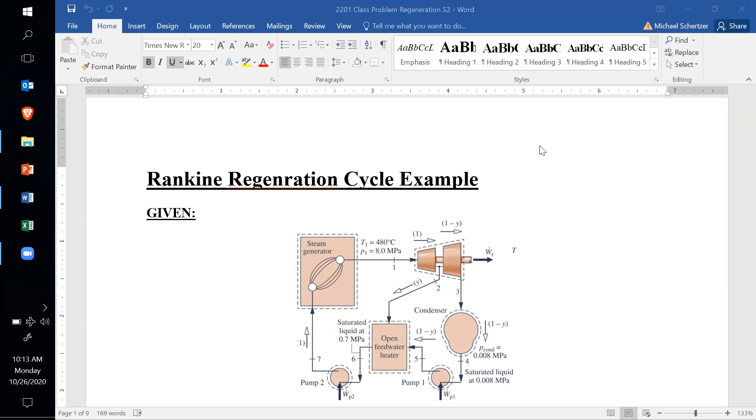Okay, so let's say this is an exam, and I open this up and I see a Rankine regeneration cycle.

Oh, looks like we do have a question here. Is there an SIS grade and a MyCourses grade? Which one is the actual grade you received?

My Courses will give you a current numerical grade, what you have in the course. I think by SIS grade, maybe you mean letter grade. I don't know what the conversion from the numerical grade to the letter grade will be exactly, because it does change a little bit every year, because of the way that we do things in this class. We try to give ourselves the freedom to challenge you on exams, which means that we don't hold tight to, you need to get over a 90 to get an A.

So typically the grading scale looks a little different in this class. Once we have all the grades from the second midterm, I'll post another relative standing sort of graph so you can see where you are if the class ended today. But remember, the final can still overwrite one of your two midterms if you do better on the final than the midterms. Yes, so I will put up another breakdown. We just have to have all the grades in first.

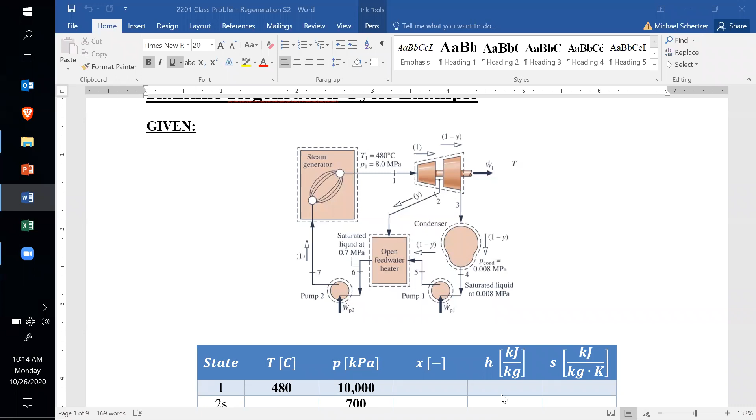So if this was a final and I see something that looks like a Rankine regeneration problem, what I want to do - I like to do this in color, but you could do this any way you want - is right at the beginning, before I even start to do anything else, kind of show where the mass splits. I'll try to keep the same color coding that I used in the lecture.

So here we have Y times M dot. Remember, Y is some percentage of the mass flow. It's probably fairly low, like maybe 25% or less. The majority of the mass flow keeps going through the second turbine, but some of it comes off here.

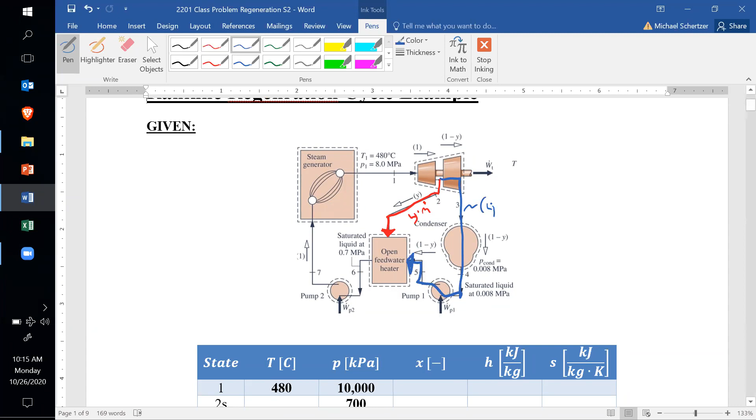So then there's this bit that goes through the second turbine, through the condenser, through the first pump, and into this open feed water heater. So everything on this line is going to get - so if all the mass flow rate went into here and I took out Y percent of the mass flow rate, and we're at steady state, then this must be 1 minus Y times the mass flow rate. So again, if Y was 20%, then 20% goes here, and 80% goes along this blue line.

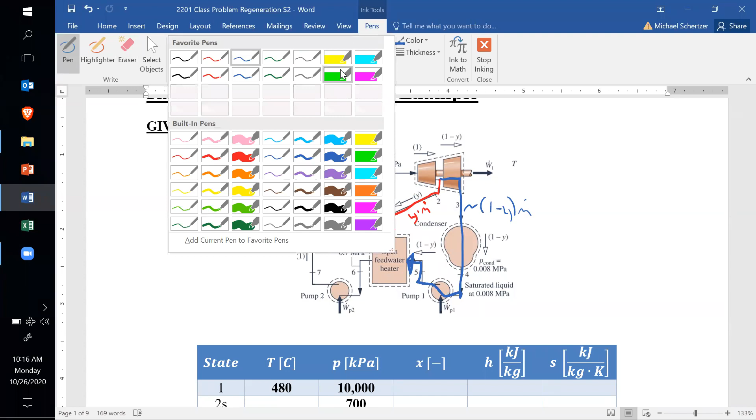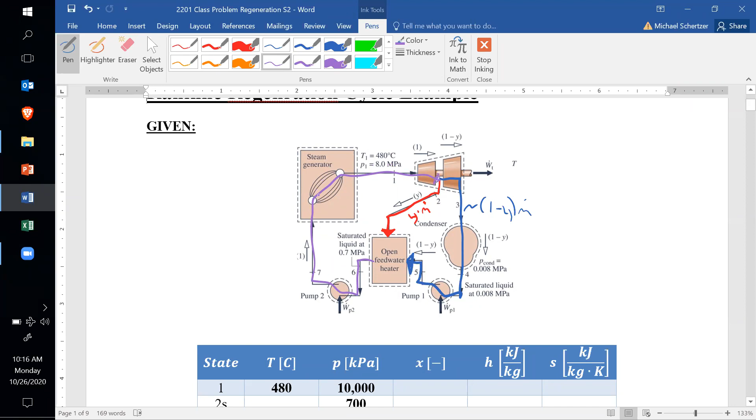Now, then in the open feed water heater, everything comes back together. So now coming out of here is going to be the total mass flow rate, through the pump, through the steam generator, and through the first turbine until we get to this node where things split up. So this is going to be the total mass flow rate.

Now, it doesn't take too long to do that, and I think doing that gives me a reference, so I can keep looking back up there to see what's going on when I do a first law analysis on a particular component. I can look at my picture to see what mass flow rate is involved where. And I like that because it means I'm thinking on the fly less - I'm trying to standardize the process. So I like to do that.

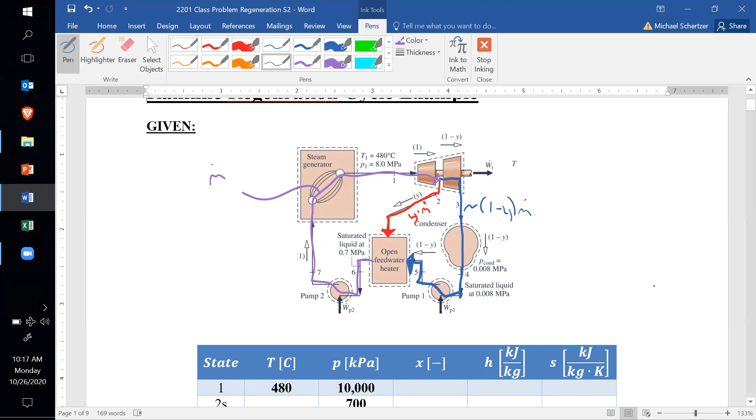I know some people use colors on the second midterm, and I always like to see that. Just for me, it helps. But if you've got a different method, that's fine. I took this problem right out of the textbook.

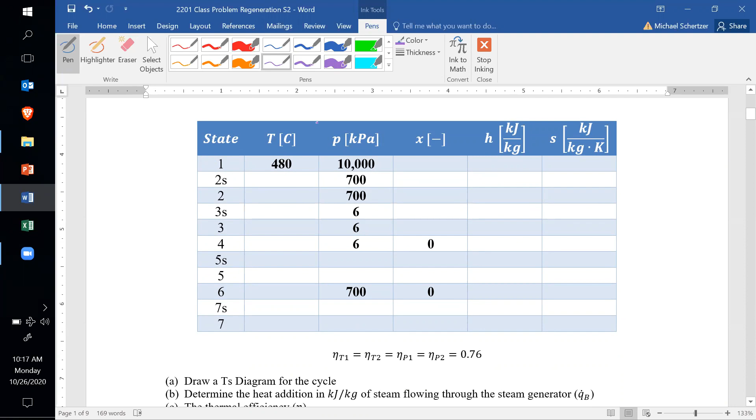I'm just going to zoom out for a second. When we look at this problem, it's maybe a little bit daunting - there's 7 different states. There's 2 turbines and 2 pumps, and all 4 of those components have isentropic efficiencies. So that's really like 11 states that we have to fix.

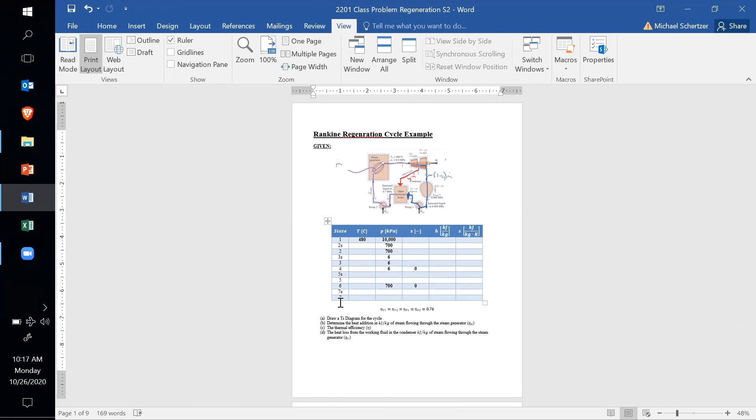And when we look at the state table here, there's not a lot of information. Actually, this information wasn't given on a state table - it was all given sort of in text. So I read the text and went through line by line and put information in here.

Now, if this was an exam, you would have more information than this on the state table. I would populate some of it so you could still go through and do parts of the problem, but you wouldn't have to fix all the states. We all know that fixing states takes a certain amount of time, and I'm not going to have you fix 11 states because that itself maybe takes more than half an hour. I don't want to be testing you on the final exam on things like can you do linear interpolation. So some of these might be blank, but you would expect on a final to see more of a state table filled in than this, particularly if it has this many states.

But that doesn't mean we won't still go through it. I won't get numerical answers, but I'll show you how to fix all these states.

Just because you'll see some of a state table filled in at the end doesn't mean you know which part's not going to be filled in, right? So it's still good to talk about how to do the whole thing.

The first thing I would look at in a state table, we'll go through the states at the end because I'm a big advocate of doing the symbolic solutions first. But here I can see in state 1, I have two independent intensive properties, assuming that's superheated vapor, so I can fix that one. I can fix state 4 right away because it gives me a pressure and tells me it's saturated liquid. And I could fix state 6 right away because again it gives me a pressure and a saturated liquid.

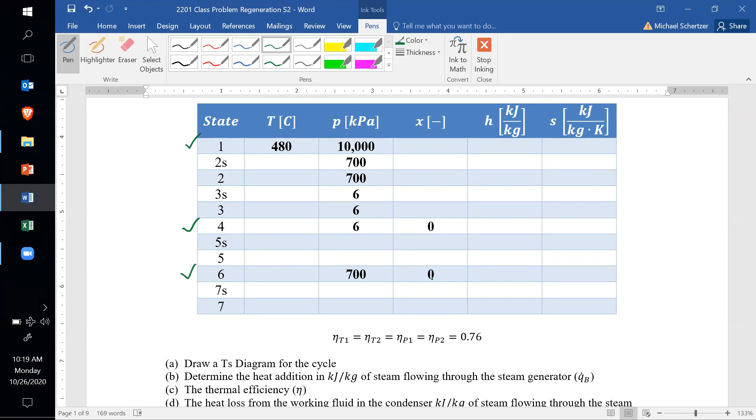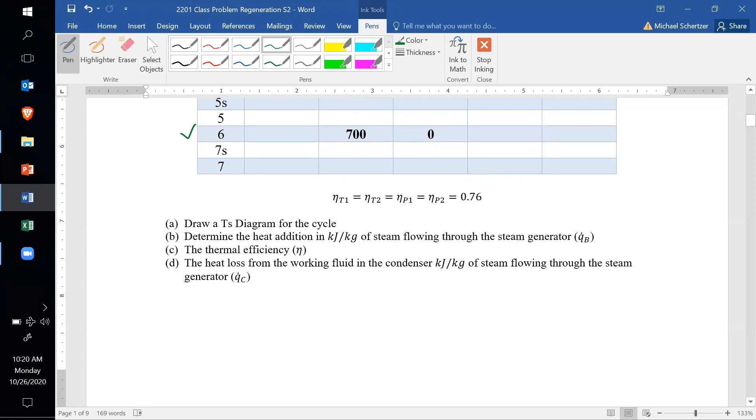So instead of doing the numerical stuff first, it also tells us isentropic efficiencies of all the turbines and pumps. So instead of doing the numerical stuff, I'm just going to go straight to the different parts of the problem and try to get symbolic solutions. Or in the first case, I'm going to draw what my TS diagram looks like.

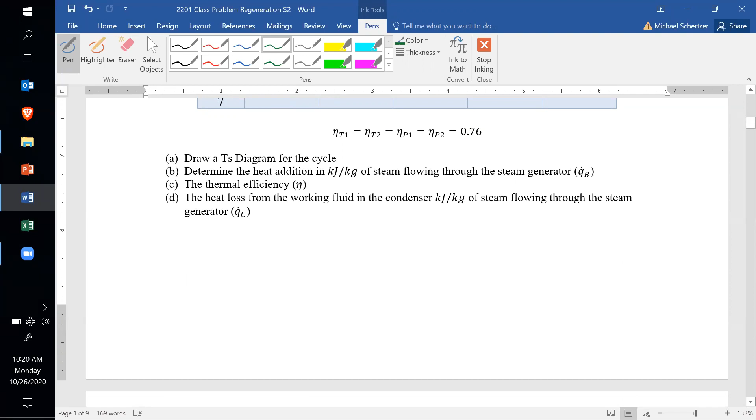Because that part is going to be the same all the time, because that's the process. And this is kind of what engineering is about: if you set up good processes, you'll get good answers more often than not.

Even if this was some kind of crazy cycle, if you look through the textbook you can see some pretty exotic diagrams, maybe with 4 turbines, an open feed water heater between the first 2 turbines, reheat between the 3rd and 4th turbine, and a closed feed water heater between the 3rd and 4th turbine. And that's scary if you just look at it.

If you saw something like that on an exam, the first thing I would think if I was an undergraduate was, oh my God, how do I do any of this? But then the next thing I hope I would think is trust the process. Do the first law on the different components, get your big equations, ask yourself what's the benefit.

What's the cost of the cycle? What's the working fluid? That's going to help you. And then, are each of these components open systems or closed systems? But the first thing we want to do here is draw a TS diagram.

Now the only cycle we know so far is the Rankine cycle, which deals with water as a working fluid, and we're boiling it. So anytime we're boiling something like water, that means we need a vapor dome. Some of the cycles we look at starting next class will have ideal gases as the working fluids. And if it's an ideal gas problem, you don't draw a vapor dome on the TS diagram.

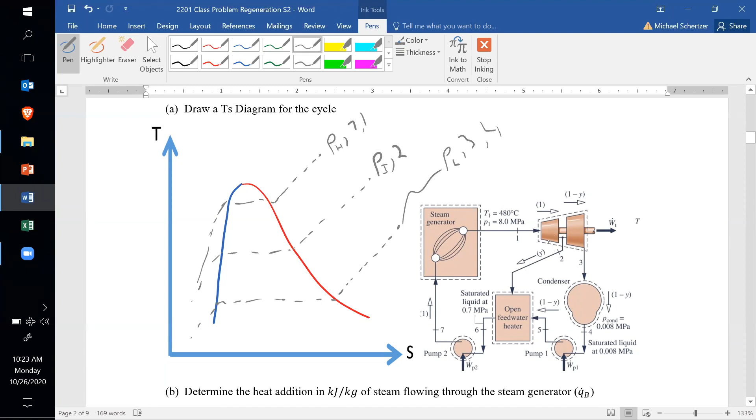So we have some intermediate pressure here, which I'm going to call PI for intermediate. Now the states associated with that intermediate pressure: state 2, which comes out of the first turbine, so that's in between my 2 turbines. And then in between my 2 pumps, I have state 5 and state 6.

So the first thing I want to do is identify where my pressures are and draw my constant pressure lines. The second thing I'm going to do is march component by component.

I'm going to assume that state 1, we're going in here as a superheated vapor. They gave us a temperature and a pressure. Now, since I'm just drawing this, I don't actually know if state 2S, which is vertically beneath state 1, is going to be under the vapor dome or outside it. So I don't trust too much in my sketch that says this is a superheated vapor, but that's where it looks like it is.

And then state 2 is going to be on the same pressure line, but over to the right. So this was the ideal first turbine and the real first turbine. Then I have an ideal second turbine as I go from state 2 to state 3S. Again, my sketch kind of shows this is under the vapor dome, but who knows, because it's just a sketch.

And then my real turbine over here is state 3. So now I've gone from 1 to 2 to 3. The numbers on this diagram are not correct, I just pulled this picture from the textbook. But as I come out of the condenser at state 4, it tells me I'm still at this low pressure — state 3 and 4 are at this low pressure, but I'm a saturated liquid. So now I've got state 4 over here, and my process from state 3 to state 4 looks like that.

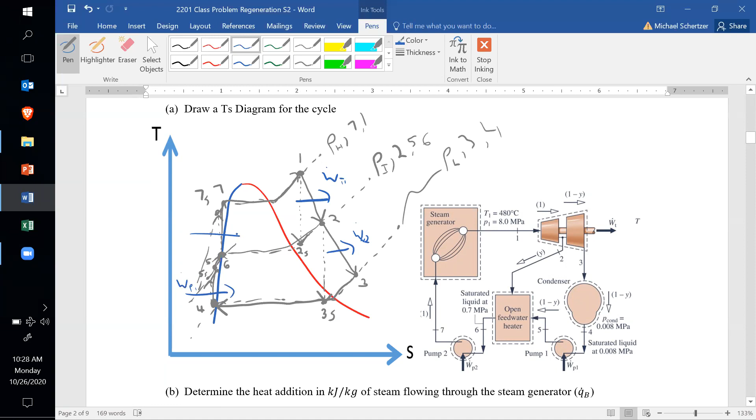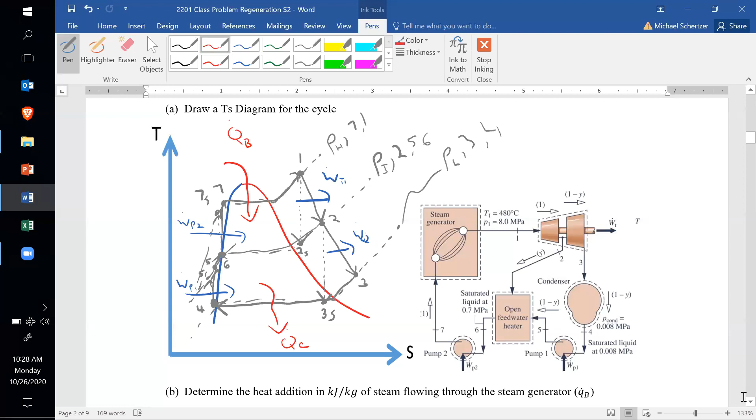We're putting power in at the first pump. We put power in at the second pump. We add some heat here at the boiler, and we reject some heat at the condenser. This might be helpful if I'm doing something like trying to find my thermal efficiency, which we'll see later. It helps me pick up which components I need there.

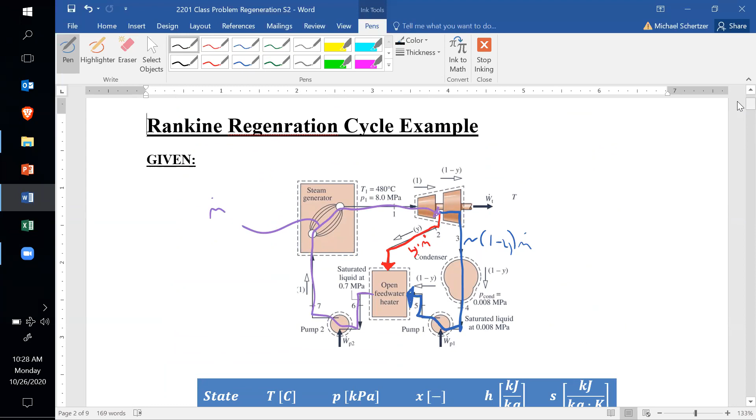So now the next part of the problem says, determine the heat addition in kilojoules per kilogram flowing through the steam generator, right, or I wrote little q dot here. So this is going to be q dot of the boiler divided by m dot total, that's little q dot. Boiler or steam generator, I use those two words interchangeably. The textbook, when it says boiler, means it only gets to a saturated vapor, and a steam generator goes further than that into the superheated vapor region.

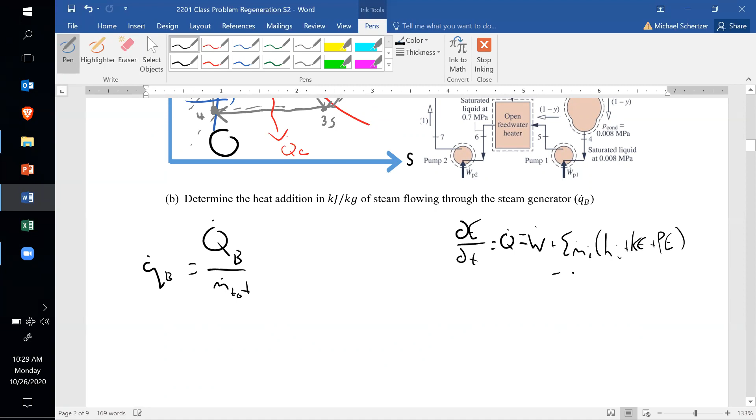So now here, I would do the first law on the boiler: dE by dt is equal to Q dot minus W dot plus the sum of m dot in, h in plus the kinetic energy term plus the potential energy term, minus the sum of m dot out, h out plus the kinetic energy term out plus the potential energy term out.

So the assumptions I'm going to make here for the steam generator or the boiler is that it's at steady state. You can disregard this thing over here. That it's passive, so there's no fan blades in there. That it's got one inlet and one outlet. And that we can neglect kinetic and potential energy.

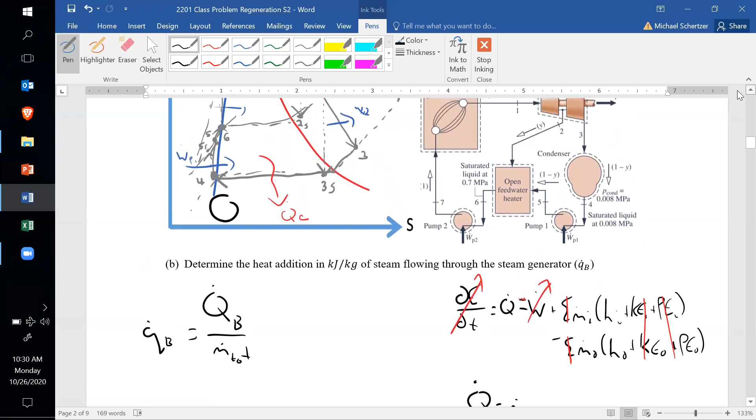And if I do that, we get the Q dot of the boiler is going to be equal to m dot times H out minus H in, right? So H out is going to be here at state 1 and H in is here at state 7. So this is H1 minus H7.

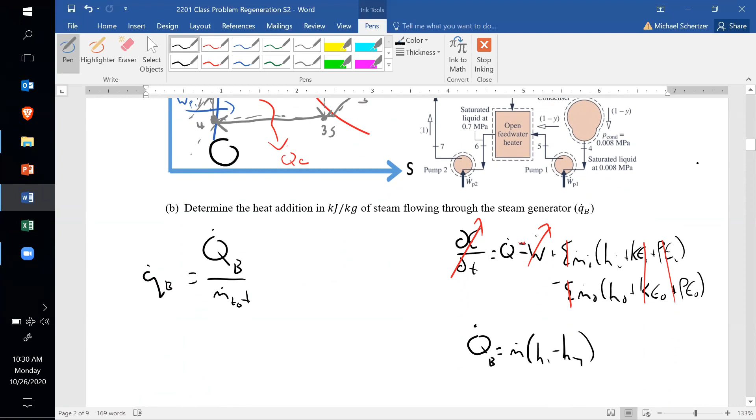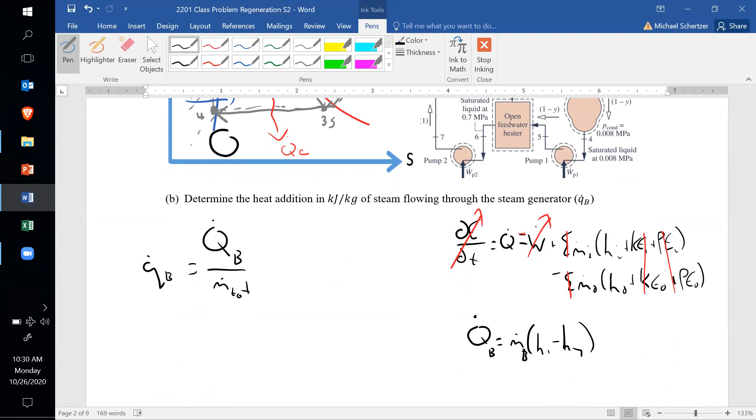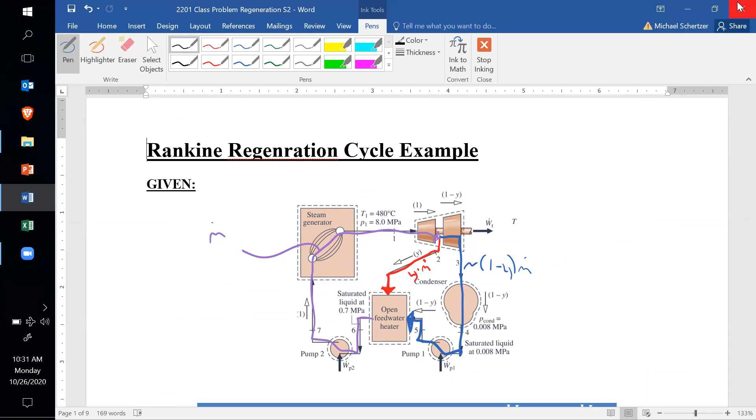Now, the tricky thing is this is m dot of the boiler. And the thing that's tricky about Rankine cycles is that the mass flow rate through any individual component could be different than the mass flow rate through other components. So I could go back up here to this color-coded example that I have, and I see here that through this steam generator, I have the total mass flow rate.

So now I can see that this is going to be equal to just m dot, or m dot total maybe, H1 minus H7. And I can put that up into this equation and I'm going to get just H1 minus H7. And this is good, we have an equation. I don't know any of these things yet, but I see that if I could fix the states, then I would be able to answer this part.

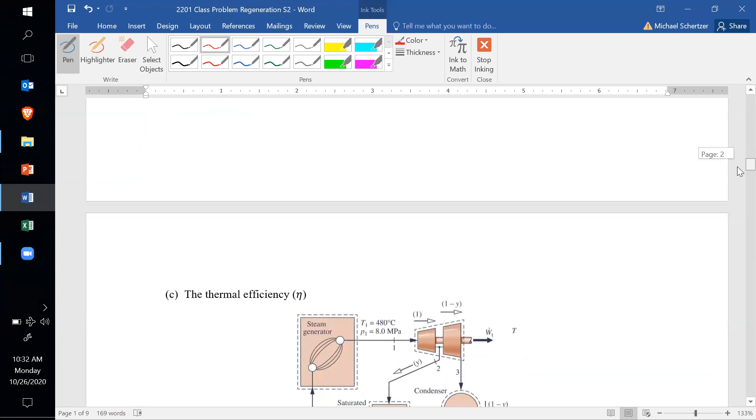Now, for the sake of this example, I want to go through all the symbolic stuff first, and then I'll show you how to fix the states at the end. So we will skip this now. And you could do this on a test too. Let's say you weren't comfortable with how to fix the particular states, if you still go through and do the analysis and get to these symbolic solutions, you're still demonstrating that you have some understanding of how to do these problems. I think that's always a good strategy: you start with the equations and make the assumptions, and then I can see what your understanding is.

And future you, so if you were doing this at your work and then you came back to a problem like 4 years after you did it the first time, you know, it's like commenting code. Now you can understand what's going on.

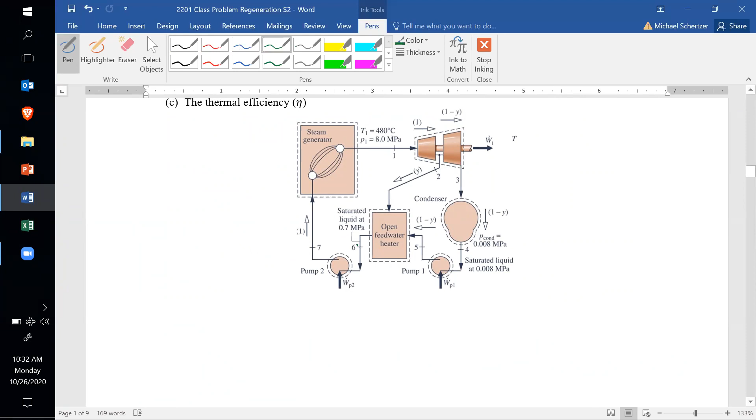So now we're going to try to find the thermal efficiency. We know that the definition here is it's the net work or the net power divided by the heat transfer rate in. So what I try to do is identify what contributes to power.

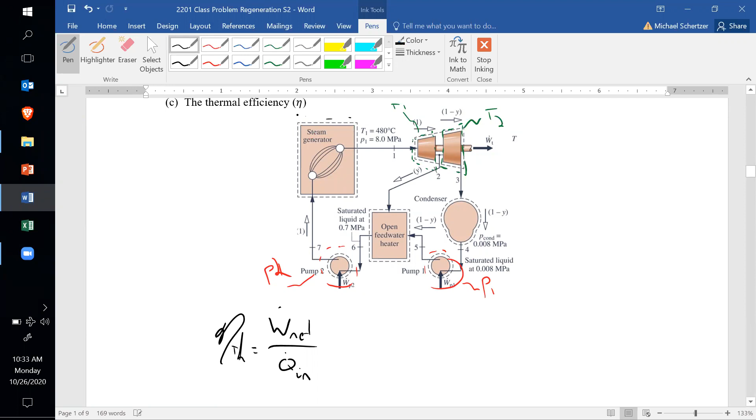So here's turbine 1, that's going to be a positive number from the first law. Here's turbine 2, also a positive number. Here's pump 2, and this over here is pump 1. And I coded those red because those are going to be negative numbers when we put them into the first law. And we already did the steam generator first law, so we've already done this.

So now if I do the first law, dE by dt is equal to Q dot minus W dot plus the sum of m dot in, H in minus H out, minus the sum of m dot out... sorry, this is not right. This is H in plus V in squared over 2 plus GZ in, because it's a metric problem, plus V out squared over 2 plus GZ out. Now for the turbines and the pumps, I'm going to assume that we're at steady state.

We weren't told anything about heat loss, so we're going to assume that that's small compared to the power. We're going to neglect changes in kinetic and potential energy. And each one of these components is one inlet and one outlet, right?

The mass splits not inside any of the turbines, but at some node that's in between these two turbines. So these turbine and pump powers, they're still going to be the thing that we expect, m dot of the particular component times h in minus h out. And the turbine values will be positive and the pump powers will be negative.

So here we're going to get, for the first turbine, m dot of T1, H1 minus H2, plus the second turbine, m dot T2, H2 minus H3.

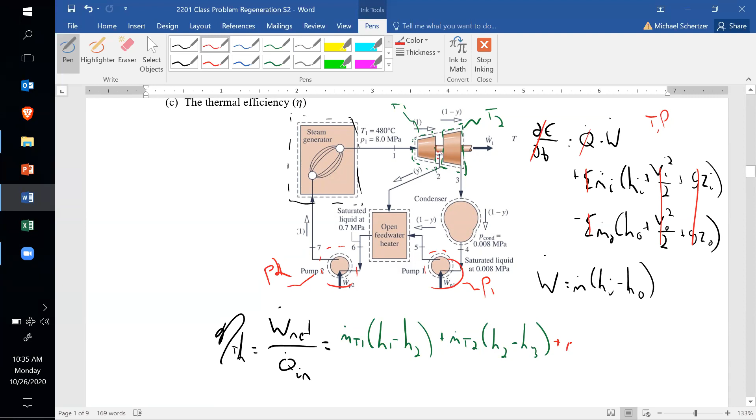Now the pump powers, I'm still adding them, but they're negative numbers, right? So they're going to reduce my net power. This is going to be m dot P1, H4 minus H5, plus m dot P2, H6 minus H7.

And this, I already did the boiler equation, right? We already know that this is m dot total through the whole boiler, and this is going to be h out minus h in, which is h1 minus h7.

We've also already constructed this so that I know that through the second turbine, we get the undiverted mass flow, just like we do through the first pump. And then the second pump gets the whole mass flow, as does the steam generator and the first turbine.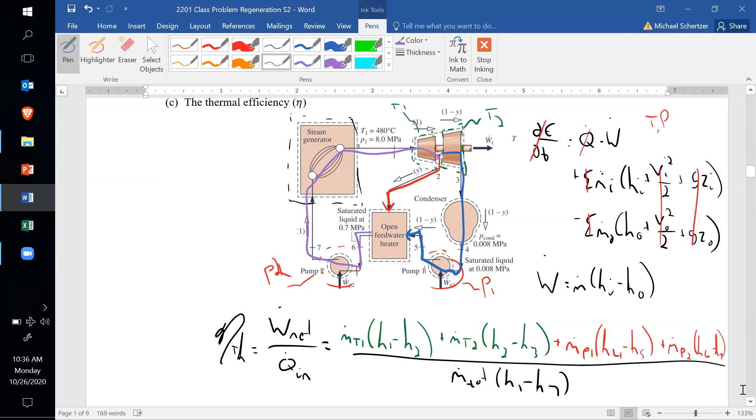So now here, I have to sub in. I can't just, if this was like a reheat cycle and we got to this point, we would just say all the mass flow rates are the same, so I'll cancel them out. But here we have this extra step, right? So this first turbine does get the whole mass flow rate.

So that's going to be m dot times h1 minus h2. But the second turbine is going to get 1 minus y times m dot, h2 minus h3. The first pump also gets 1 minus y. This is now h4 minus h5. And the second pump does get all the mass flow rate times h6 minus h7.

And that's the numerator. And my denominator is going to be m dot times h1 minus h7. Oops, there's an m dot in here as well. Right? Because remember, 1 minus y, that's just like a per unit or a percentage number if you multiply it by 100.

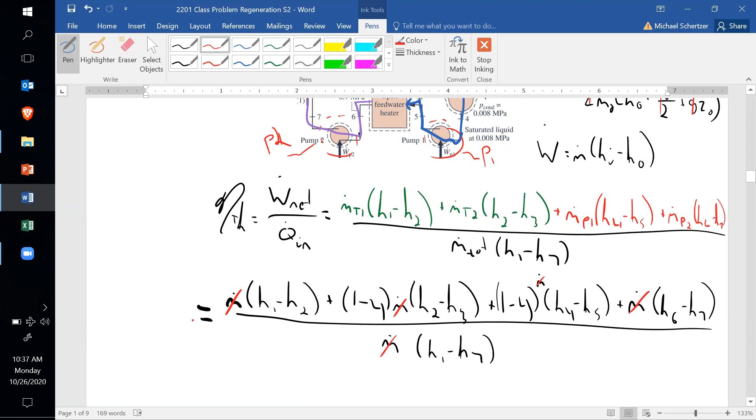So now everything is now multiplied by the total mass flow rate. And that's why we talk about it as like the percentage of the total mass flow rate, so that when we get to this equation, everything is still multiplied by m dot. So I can factor that out of the numerator and the denominator and cancel it out. And then I'm going to get that this thermal efficiency

is just going to be h1 minus h2 plus 1 minus y, h2 minus h3 plus 1 minus y, h4 minus h5 plus h6 minus h7, divided by h1 minus h7.

Now, if it was me, I would not go to the effort of memorizing this equation, because this equation is only going to be true if it's an open feedwater heater that looks just like this picture. Instead, I'm going to trust the process, right? The process that I got here was I looked at where are the places that are contributing to the net power, do a first law everywhere there, and where are the places that are adding heat. And if you do that, it doesn't really matter how exotic the picture of the cycle that I give you is. You can go through and you can make the right equation for that case.

Now, the problem with this equation, right, is that even if I knew all these enthalpies, I still can't solve the problem because I don't know y either. So how do I find y?

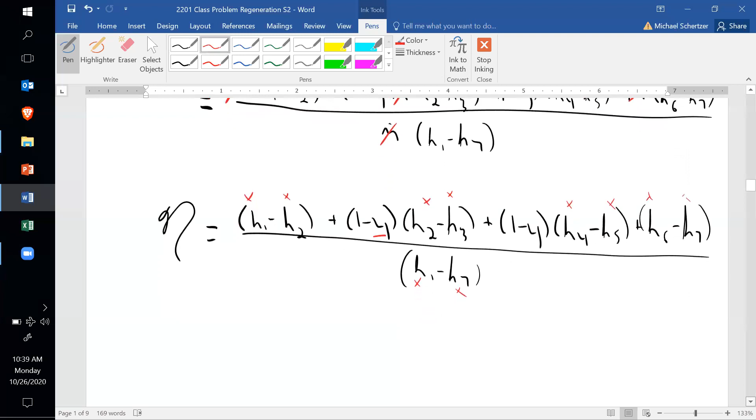Now, y is a mass flow rate, right? In this class, we basically have three strategies for finding a mass flow rate. One, I know the area times the velocity divided by the specific volume. If I knew that, then I could find y.

Number two, I look for some place where maybe they tell me the heat transfer rate or the power, and I do the first law. So if in this case it told me that the net power was 1 megawatt, then I could use my net power equation, and if I could solve all the h's, then I could solve for y. That's not the case here.

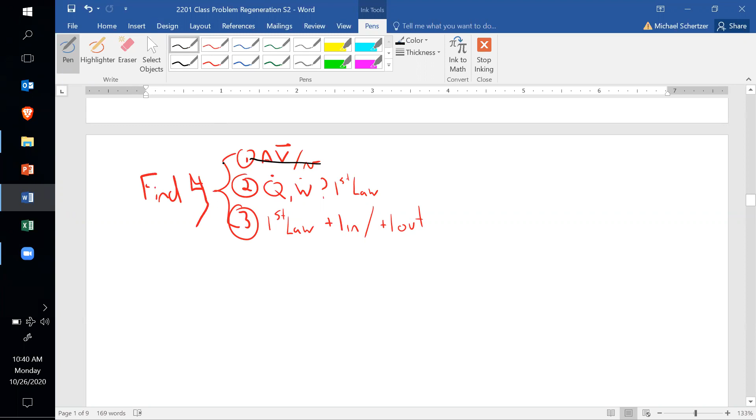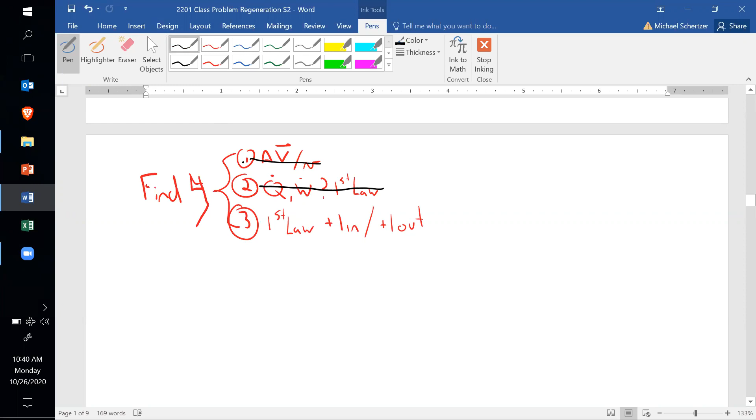So the other thing we can do is the first law on a component that's got more than one inlet and or more than one outlet. In this case, we don't know anything about the areas or velocities, or how much heat is put in by the boiler, or how much heat is rejected by the condenser, or the net power. So instead, we have to do the first law on something that has more than one inlet and or more than one outlet.

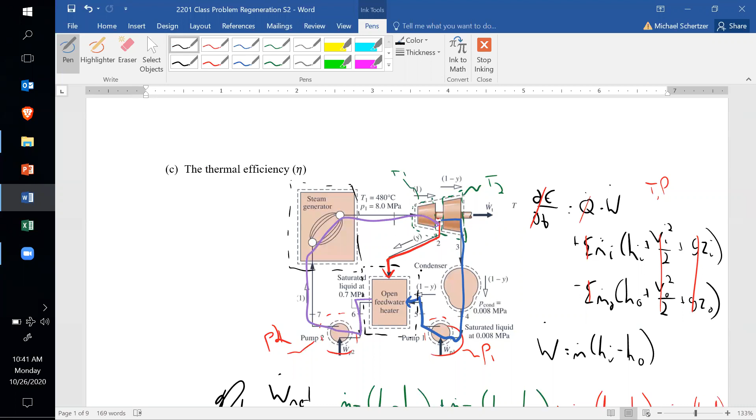I think no matter how we end up asking you a problem about regeneration, you're going to end up having to do a first law analysis on the feed heaters. So if you get to this point and don't know what to do, or even if you have no idea what to do on one of these regeneration problems, just write down the first law and do it on the feed water heater or heaters, because it's going to be important.

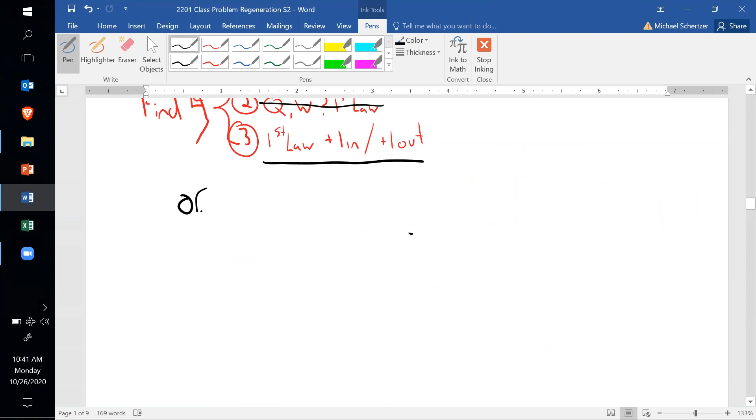So now dE by dt is equal to Q dot minus W dot plus the sum of M dot in times H in, plus there's a kinetic energy term and a potential energy term, minus the sum of M dot out times H out plus some kinetic energy and potential energy terms.

So for the open feed water heater, it's steady state. It's definitely passive because it doesn't have any fan blades on the inside of it. It's not a turbine or a pump. No kinetic or potential energy changes.

Now, this won't always be the case. You could have a feed water heater that is losing heat to the outside world. But in this case, and this is always a little bit tricky with these heat exchangers, we end up sometimes calling them adiabatic, meaning they're not losing heat. This doesn't mean that heat is not being transferred inside the control volume. These Q dot and W dot terms are about stuff that passes the border of our system. So in this case, it is adiabatic.

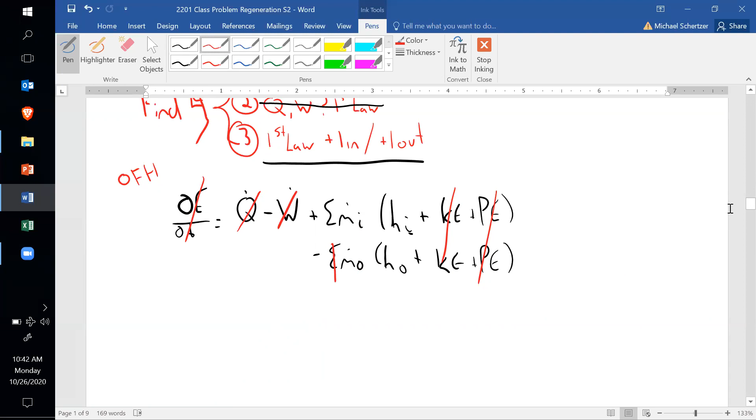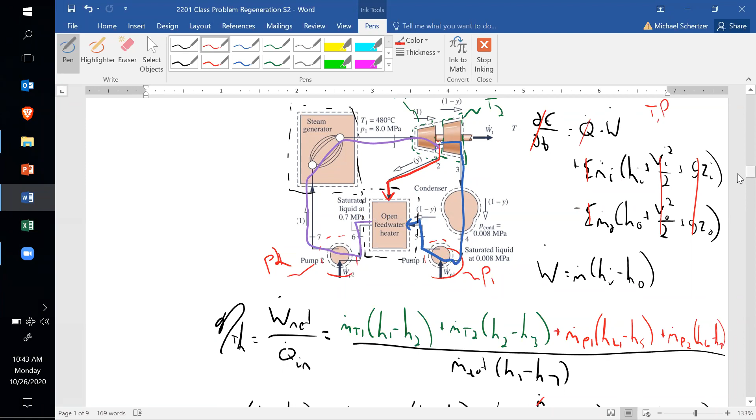And actually, in this case, if we look at the feed water heater, there's two inlets and only one outlet. So this open feed water heater, if we go back to this picture, there's two inlets, state 2 and state 5, and one outlet. I can also look at this and see that state 2 is coming in at y times m dot. State 5 is coming in at 1 minus y times m dot, and state 6 is going out at m dot. Again, that's why I like color coding it, because it makes it pretty easy for me to see just by looking at that picture.

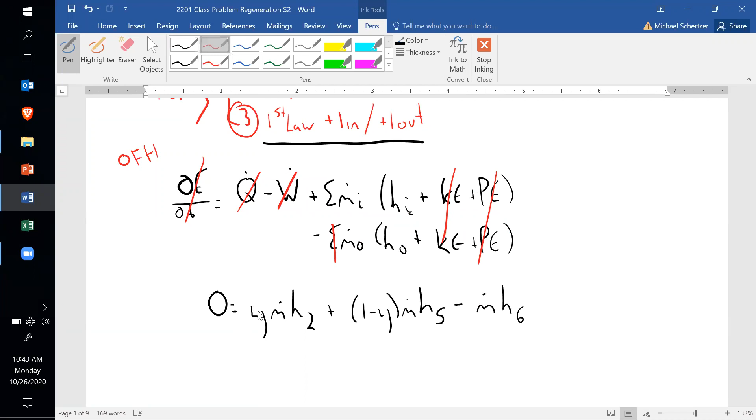So now this is going to be 0 equals the sum of the mass flow rates in. So we said y times m dot comes in at state 2. The other inlet was 1 minus y times m dot, at state 5. And then the outlet is the total mass flow rate times H6. So now I can divide both sides of this equation by m dot.

And then I can collect like terms, and I can see that 0 is equal to y times H2 minus y times H5, so that would be minus H5, and then plus H5 minus H6.

But the thing I want to do here is calculate y. So I could say that y is equal to — I've got to bring this stuff to the other side of the equation — so this is going to be H6 minus H5, divided by H2 minus H5.

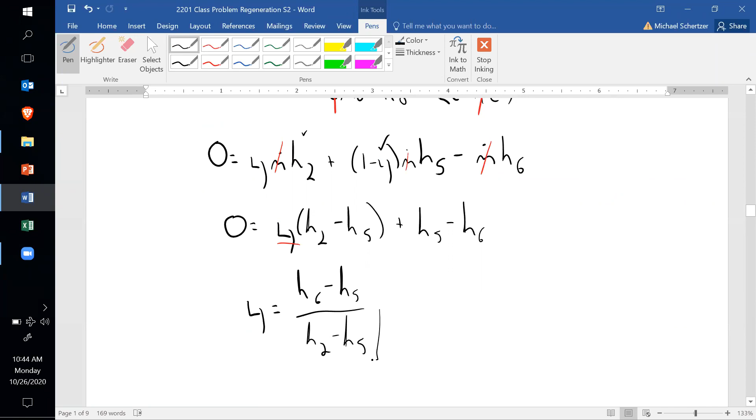So now, if I call this — if the equation for little Q dot was equation 1, my equation for thermal efficiency was equation 2 — then this would be like equation 3, and I'm putting this into equation 2 to get an equation for thermal efficiency.

We're again in this place where I don't know any of these enthalpies. Now, this problem is asked in such a way that we don't know what Y is, but we do know what H6 is, or at least we could find H6. Some problems might tell you what Y is, but this problem told us state 6 was going to be at that intermediate pressure, but was going to be saturated liquid. I could not tell you what the quality is, but I could tell you the mass flow rate, or I could tell you Y. And then you would use this first law to find H6. So it's still going to be the same fundamental equations, just a different thing you'll need to look for.

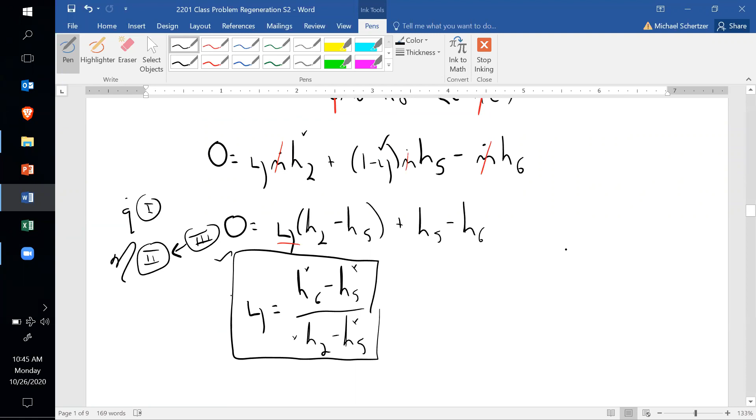So now, after that, we will have been able to answer part C, at least if we could fix all the states, which we'll get to.

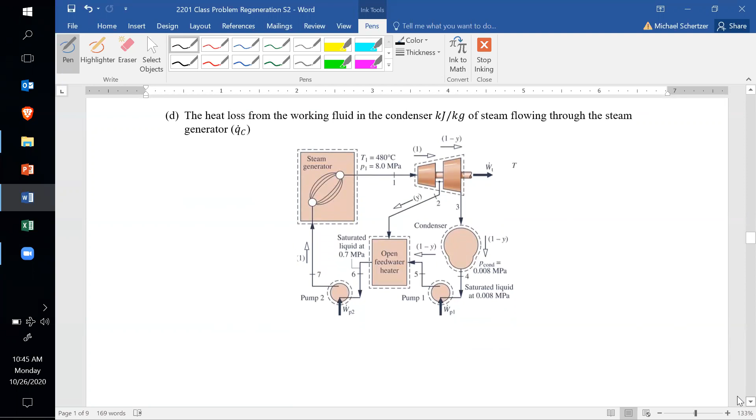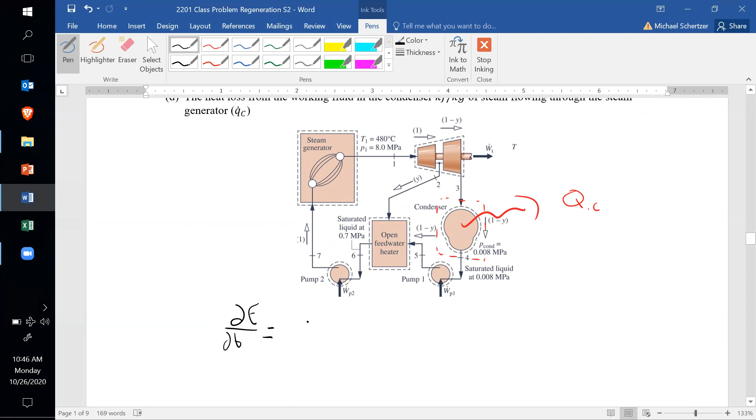Now we're asked to find how much heat gets lost by the condenser. So this is our control volume here. Again, when in doubt in thermo, write down the first law, because the first law is kind of a big deal in thermodynamics class: minus W dot plus the sum of M dot in, H in plus kinetic energy plus potential energy, minus the sum of M dot out, H out, plus kinetic energy plus potential energy. Now here for this condenser, because we don't know what's going on with the cooling water, we have to only look at the hot side of the condenser here. So here we'll say it's at steady state, it's passive, one inlet and one outlet on the hot side, and we will neglect kinetic and potential energies.

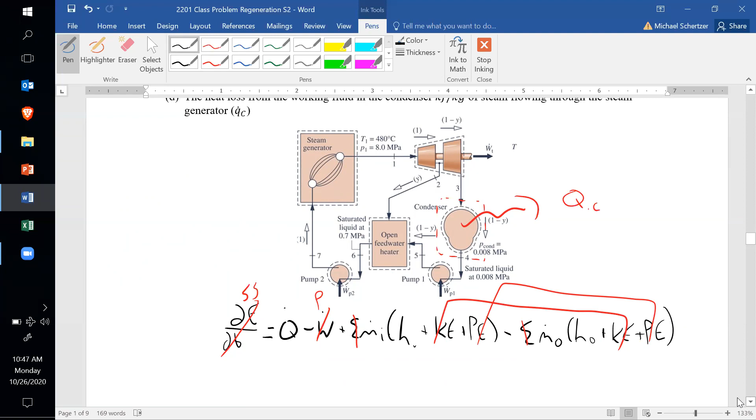So this is going to be very similar to the first part of the problem that we did. We'll find Q dot of the condenser is going to be equal to M dot times H out minus H in. So this is H4 minus H3.

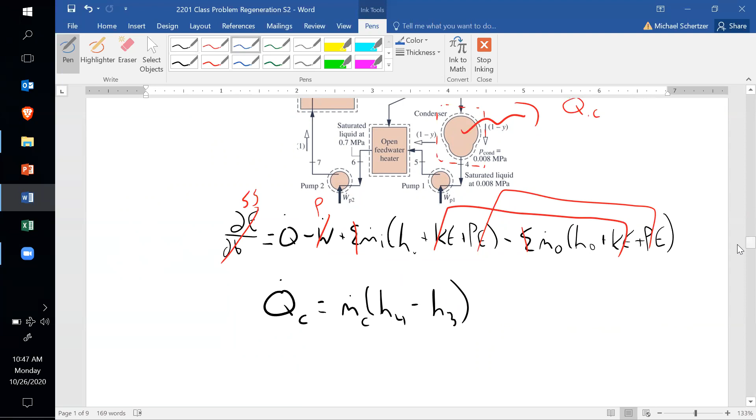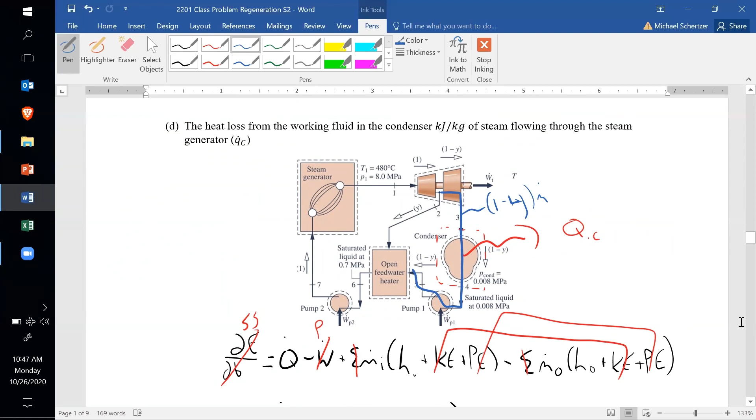But remember, if I was drawing my mass flow rates here, this leg of the cycle gets 1 minus Y times M dot. So that's the mass flow rate going through the condenser side. So this is going to be 1 minus Y times M dot times H4 minus H3.

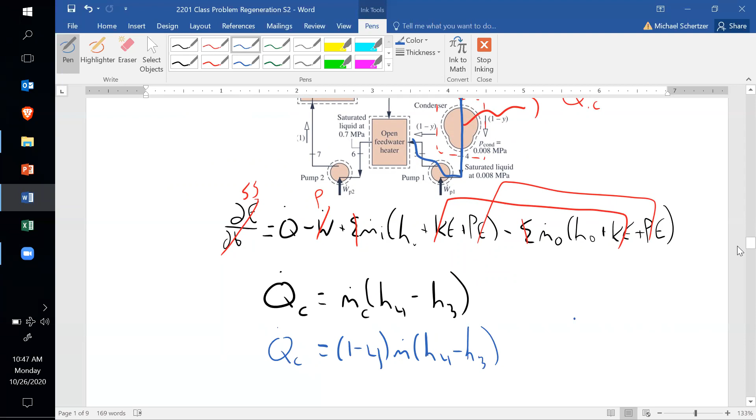Which means, the textbook is sometimes tricky this way, it won't ask for the heat transfer rate directly. It'll ask, what's the heat transfer rate per unit, or per kilogram of steam flowing through the steam generator? So it's talking about M dot total. So we don't want to scale this just by the mass flow rate going through the condenser, because then it would have a different denominator than all the other things that we're scaling by the mass flow rate. So here my little q dot C is big Q dot C divided by M dot total, and that's going to be 1 minus Y times H4 minus H3.

So here again, although at least we've got an expression for Y, we don't have the number yet. I don't have H4 and I don't have H3. So even if I didn't know how to fix states, or if I was on an exam and felt like I didn't have enough time to fix the states, you could do this part more quickly, and it still demonstrates that you have some understanding about what's going on.

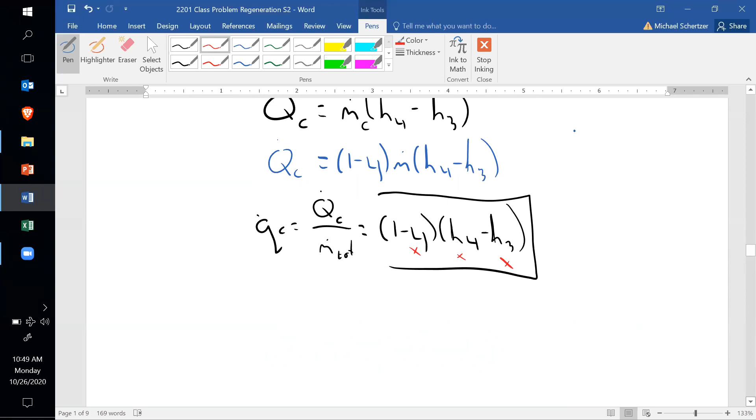But now our job would be to fix states 1, 2, 3, 4, 5, 6, and 7. There's kind of a lot of them, plus there's the 4 isentropic states that we have here too. Then I could find Y, and with Y, I can find the thermal efficiency and this little q dot C. And then with the enthalpies, I can find little q dot of the boiler. So now I won't get the numbers, but I'll walk you through the process for all of these.

So here for state 1, this is nice because I'm going to assume that this is a superheated vapor, because if it's under the vapor dome, we can't fix this state since we need 2 independent intensive properties, and we have the pressure and the temperature. So here I'm going to assume that this is a superheated vapor, and I'm going to get this from table A4. I'm also going to pull off S from A4.

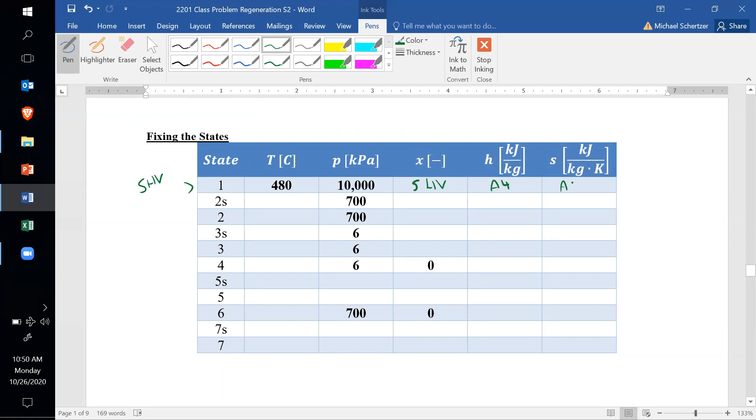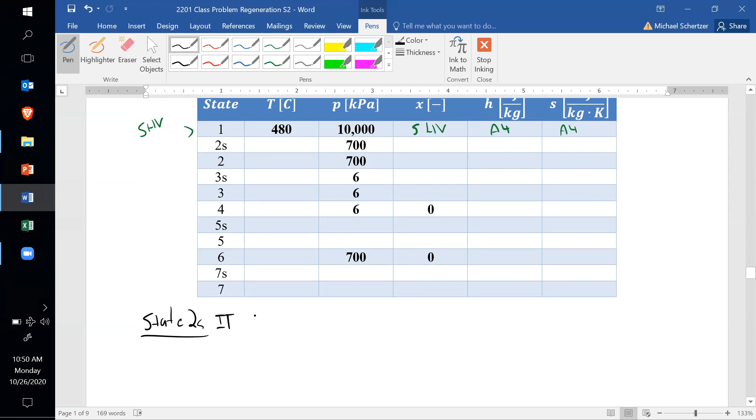So now how do I do state 2S? Remember, this is an isentropic turbine, right, an ideal turbine too. So what I need here is to recognize that S of 2S is equal to S1. So this is going to be S1.

Now I'm going to ask myself, is SF at P2S going to be less than S2S, less than SG? So basically this is saying, is it going to be under the vapor dome? And if the answer to this is yes...

then I'm going to find quality at state 2S, and I'm going to use that to find H of 2S. If not, then this will be a superheated vapor, and I will have to interpolate on table A4 to find H2S.

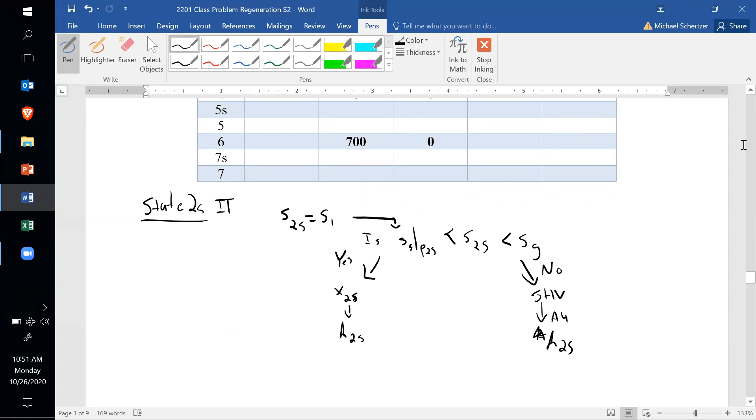Now how do I then go through the real turbine? Because now I did the ideal turbine, how do I find state 2? Now I've got to use the turbine efficiency. The turbine efficiency is power over power. But the ideal turbine, remember, the turbine power is a benefit. So the ideal turbine gives us more benefit than the real turbine.

So this is going to be m dot of turbine 1 times H1 minus H2, because it's the real turbine, divided by m dot T1 times H1 minus H2S. So in this problem, they told us the efficiency of the turbine, and we already know H1 and H2S. So I use this equation to find state 2.

Now I just want to make sure we get to all the states, so I'm going to talk about state 3 pretty quickly. Because for state 3, we do the same thing. First we've got to find state 3S. Remember, state 3 is coming out of the second turbine. So now we found H2S and H2.

State 3 is coming out of the second turbine. So now what we'd also have to do is when we found state 2, we would want to find S2 as well, because state 3S is the same as S2.

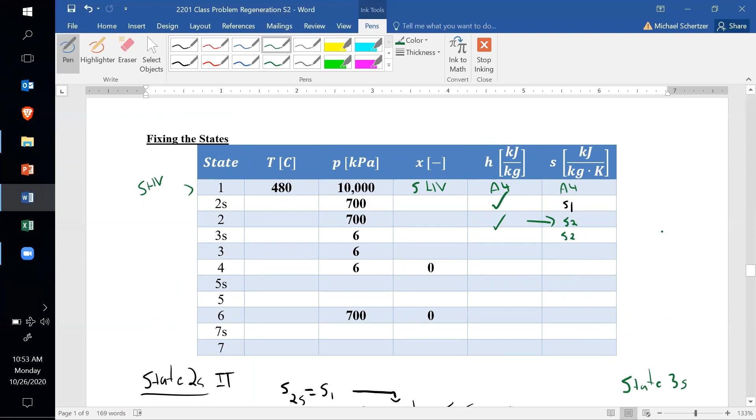And then I would have to figure out, is this going to be 2-phase, or is it going to be superheated vapor? So if it's 2-phase, then I would have to interpolate to find quality, and then use quality to find H3S. But if it was superheated vapor, then I would have to use table A4, the superheated vapor tables.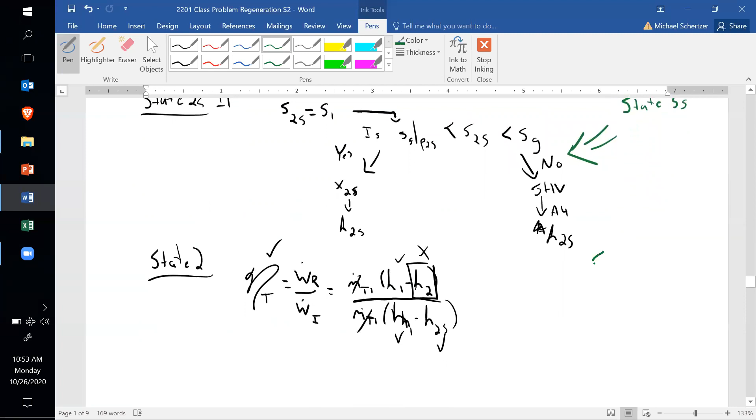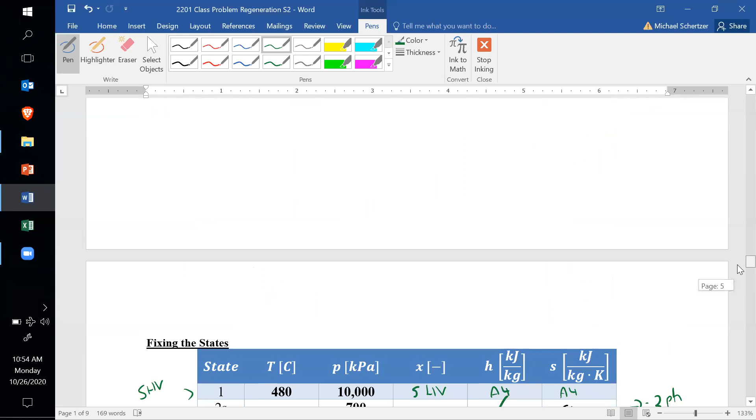And then after I found state 2S, I follow the same process — I'll have different numbers, but it's the same process. And then for state 3, I follow the same process again. It's just now for state 3, this turbine efficiency ends up being H2 minus H3 divided by H2 minus H3S, and now the only thing I don't know here is H3. So this is good, now I know H3.

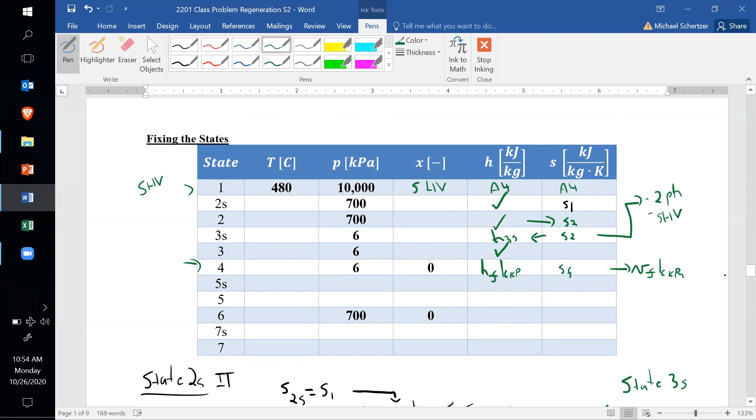H4 is kind of a gimme, because here it tells me the pressure and it tells me the quality. So this is going to be HF at 6 kilopascals. This is going to be SF at that same pressure. And then here, you might not see this right away, and that's okay, but I'm also going to look up VF at 6 kilopascals. Maybe some of you see why I did that.

But so now we know state 4, and we're looking at state 5, but we don't do state 5 first. We do state 5S. State 5S is the outlet of the ideal pump.

Now, as I go through ideal pumps, I know that H4 minus H5S — I'll assume an ideal pump, that's incompressible liquid on both sides — and that's going to be the specific volume, but I'll take the specific volume at 4 because it's incompressible, we'll say they're about the same, times P4 minus P5.

P5S and P5 are going to be the same thing. It only makes sense to talk about these pumps if they have the same pressure difference. Now, the only thing that I don't know in this expression is H5S, so I can use this equation to find the ideal outlet of the pump.

Next, I do the real pump. This is state 5. And now I have the isentropic efficiency of the pump, which again is going to be power over power. But remember here, the pump power is a cost to the system, so the ideal pump power is going to be less than the real pump power.

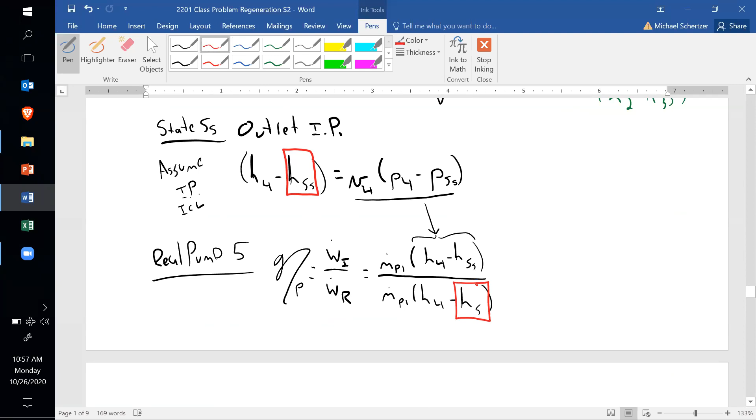So now when we go up here, we're going to be close on time. We know H5S and H6 - this is another one, right? This is just like H4, except now the pressure is different.

So this is going to be HF pressure equal to 700 kilopascals, SF, and we'll also pick up VF at this intermediate pressure.

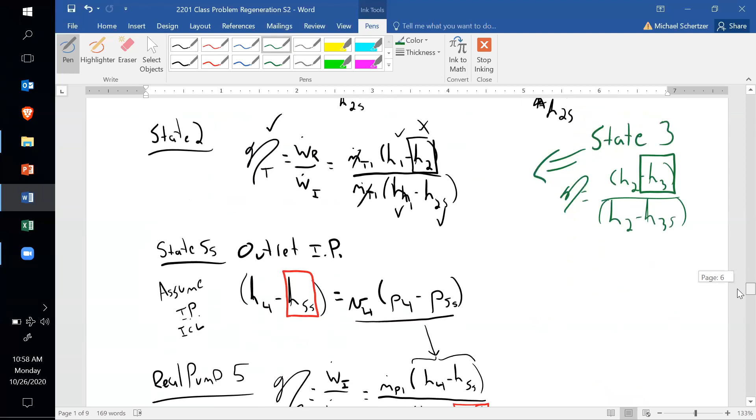And then I can do the same thing as I did here, so now this would be state 6S - same process as this, just the numbers are going to change. So H5 minus H6S is going to be V5.

No, this is 7S. So it's H6 minus H7S is going to be V6 times P6 minus P7 or P7S. It's the same thing. And then down here for state 7 is going to be the same as this, where my pump efficiency is going to be H6 minus H7S divided by H6 minus H7.

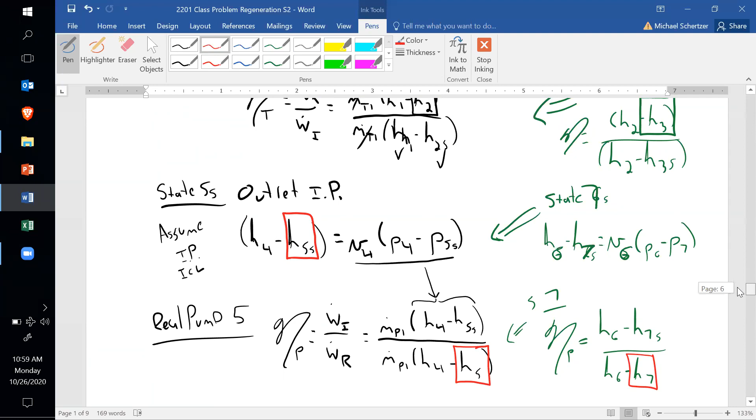And the only thing I don't know there is H7. So obviously it's going to take you more than the 10 minutes we've spent doing this to fix all those states if you get numerical answers. But now we know all of these things.

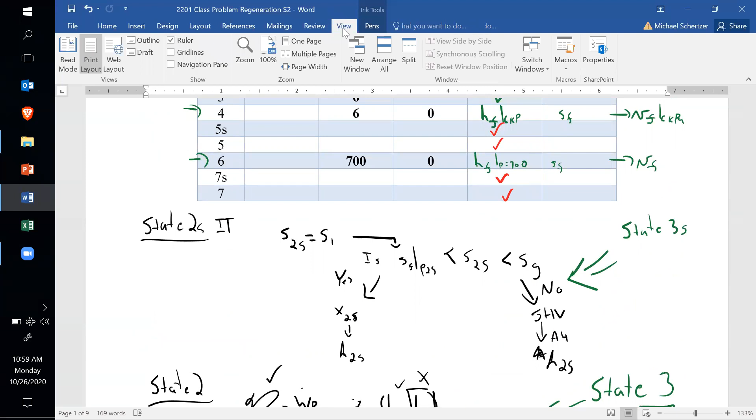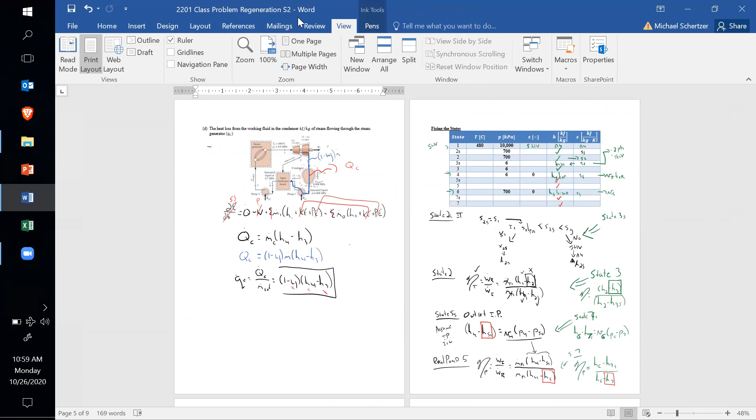So because now I know all of these enthalpies, I can go back, and I can get numerical answers for all of these other things because I can find Y. And I know H4, so now I know this heat transfer that we lose from the condenser.

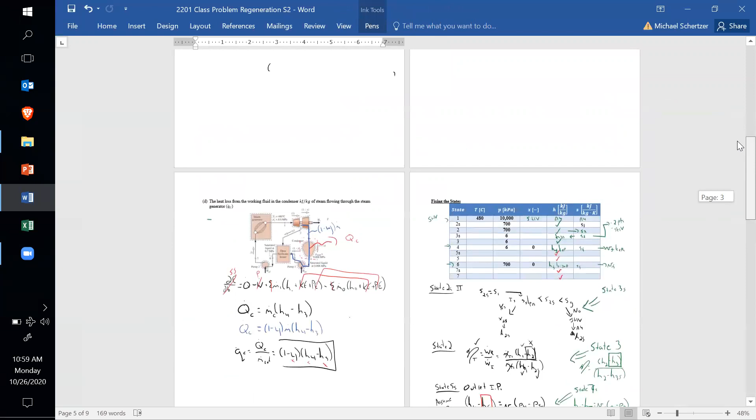I can find my thermal efficiency, and then I can also find the heat that goes in. So that is, in a nutshell, how you do these Rankine regeneration problems.

But again, if we take a step back, this process, if we use it for all of the cycles we do, you'll be able to see that it's really the same thing we do for every cycle. It's just maybe we use a different version of the first law if they're closed systems, or maybe we find H in different ways because it's an ideal gas, but it's ultimately kind of the same thing.

I'll take questions. I've got a couple minutes still.

So the question is, in this open feed water heater, what we do is, because we bled that mass out, we took some of the mass flow between the two turbines. So that's still hotter, or has more enthalpy, than what would come out of this pump. So when we mix those two things together at that same pressure, that's why we put that first pump there. Then what happens is we get something out at state 6 that's got more enthalpy than when it went in at state 5. So this is kind of like we're preheating it before it goes into the boiler.

What would be the - sorry? The closed feed water heater, the streams don't actually mix. So if you look at the picture for the closed feed water heater, this is maybe some kind of shell and tube. The cold side of the mass flow rate would be like between a bunch of tubes, and then the hot flow would just go over that bank of tubes so they transfer heat between each other. But the fluid from the hot side doesn't actually get to mix with the fluid from the cold side.